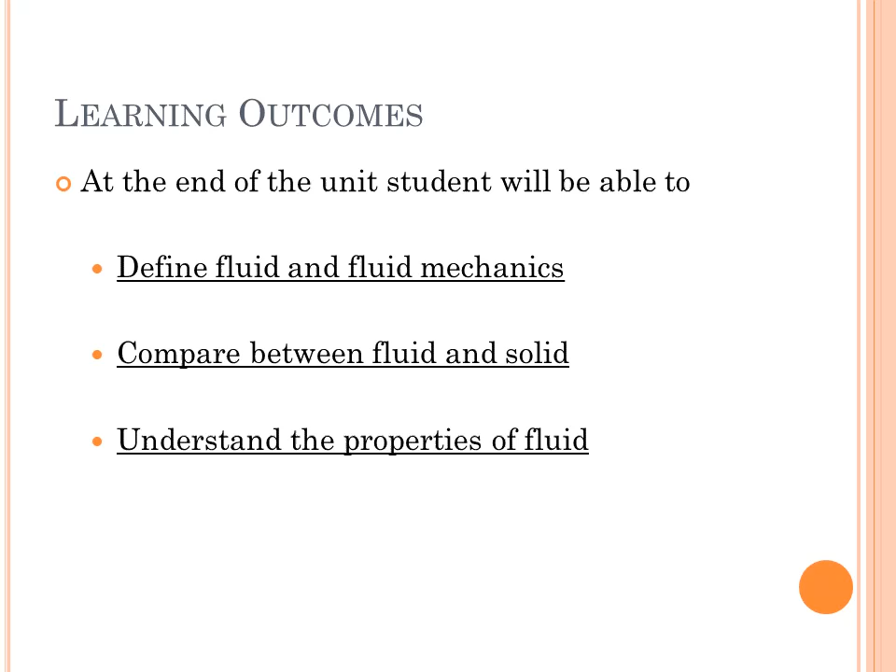At the end of the unit, students will be able to define fluid and fluid mechanics, compare between fluids and solids, and understand the properties of fluid.

Let's define fluid. Fluid is a substance which deforms continuously under the action of shearing stress of any magnitude, and it has capacity to flow. It has no defined shape. Liquids and gases come under fluid.

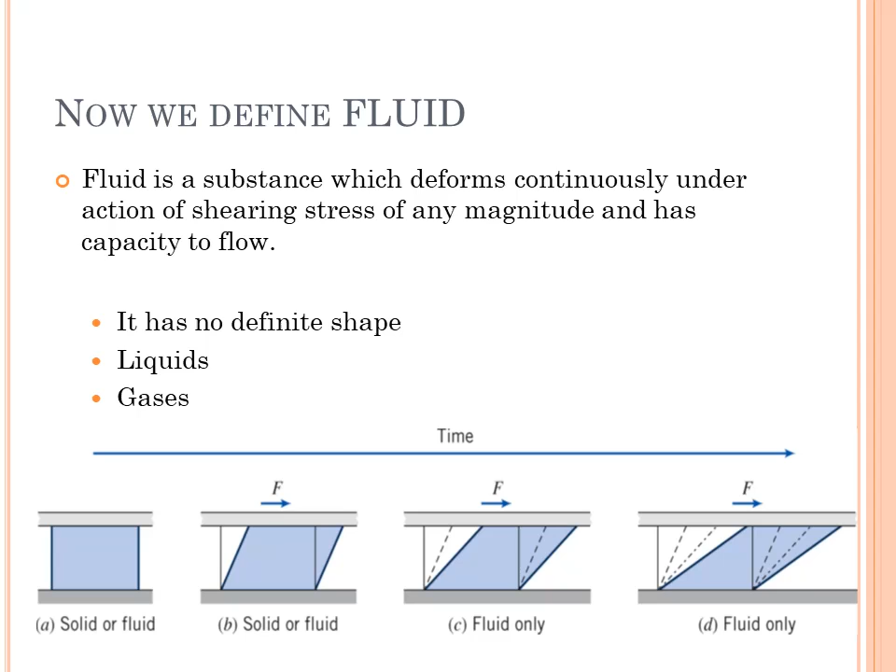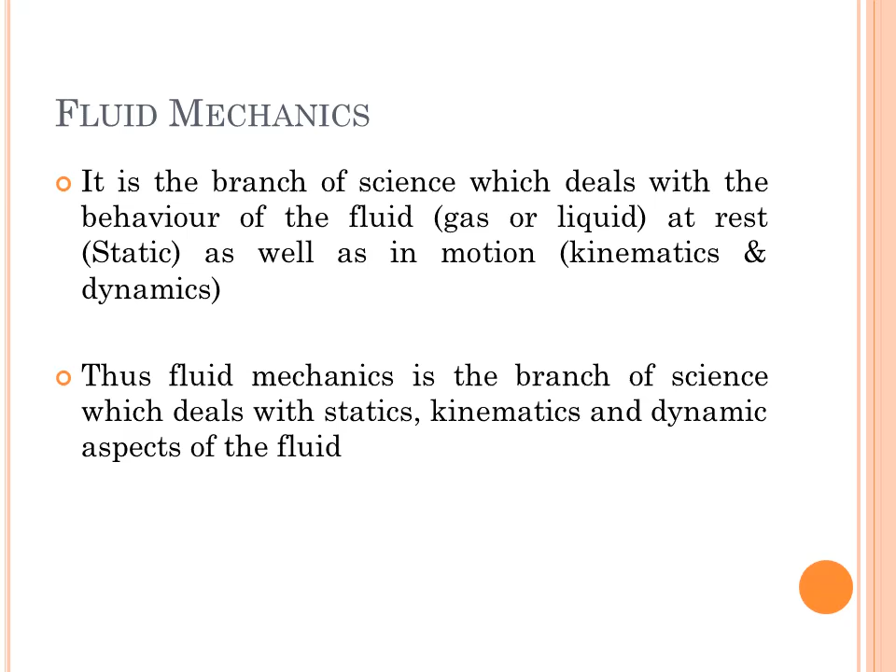Fluid mechanics is the branch of science which deals with the behavior of the fluid at rest as well as in motion. At rest means statics, in motion means kinematics and dynamics. Thus, fluid mechanics is the branch of science which deals with the statics, kinematics and dynamics aspects of the fluid.

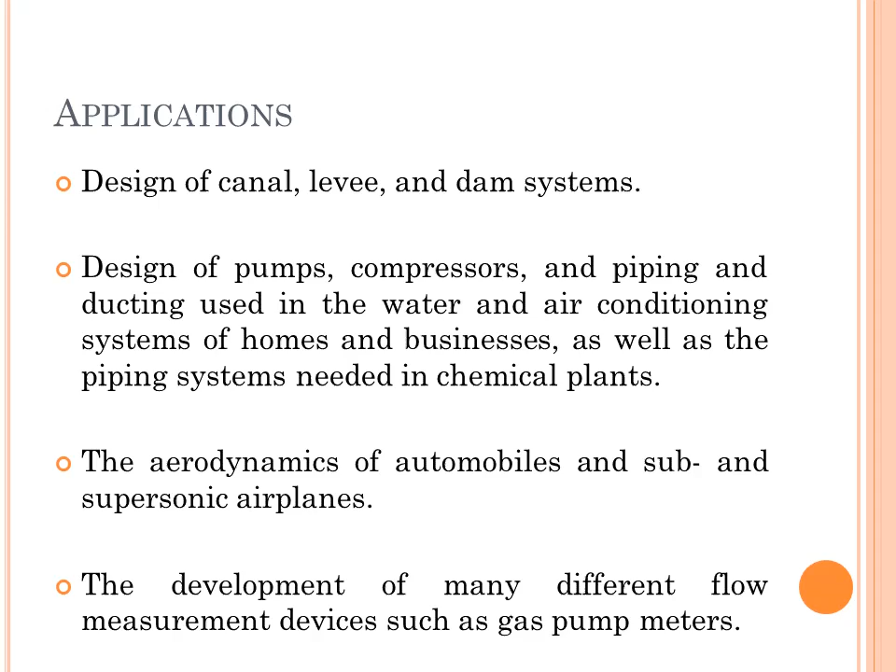Let's discuss the applications. Design of canal, levee and dam systems. Design of pumps, compressors and piping used in the water and air conditioning systems of homes and businesses, as well as the piping systems needed in chemical plants. The aerodynamics of automobiles and supersonic aeroplanes. The development of many different flow measurement devices such as gas pump meters.

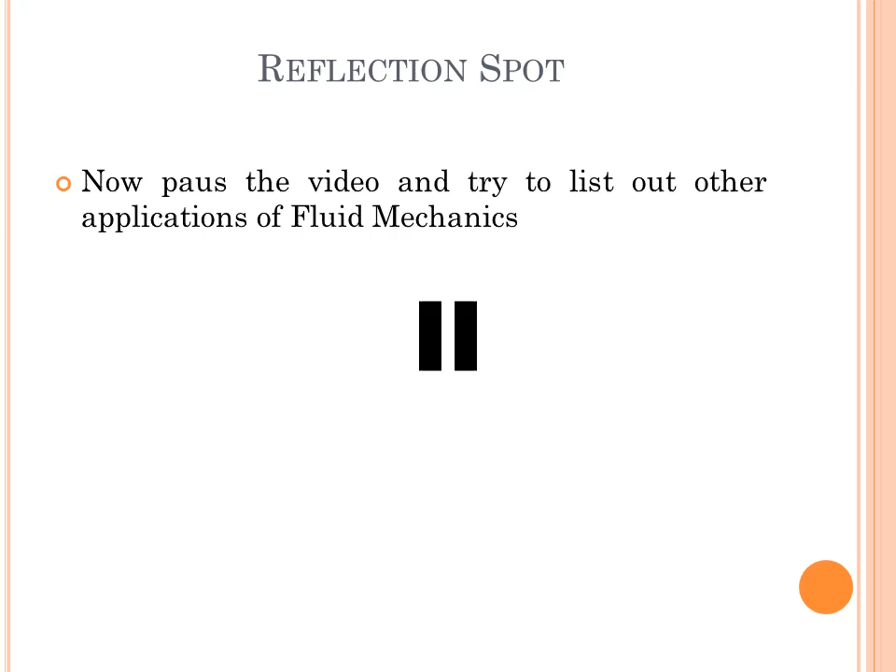Now pause the video and try to list out other applications of fluid mechanics that are used in day-to-day life. Hope you have listed out examples like blood flowing through the veins, and designs of ships, aeroplanes and various types of turbines.

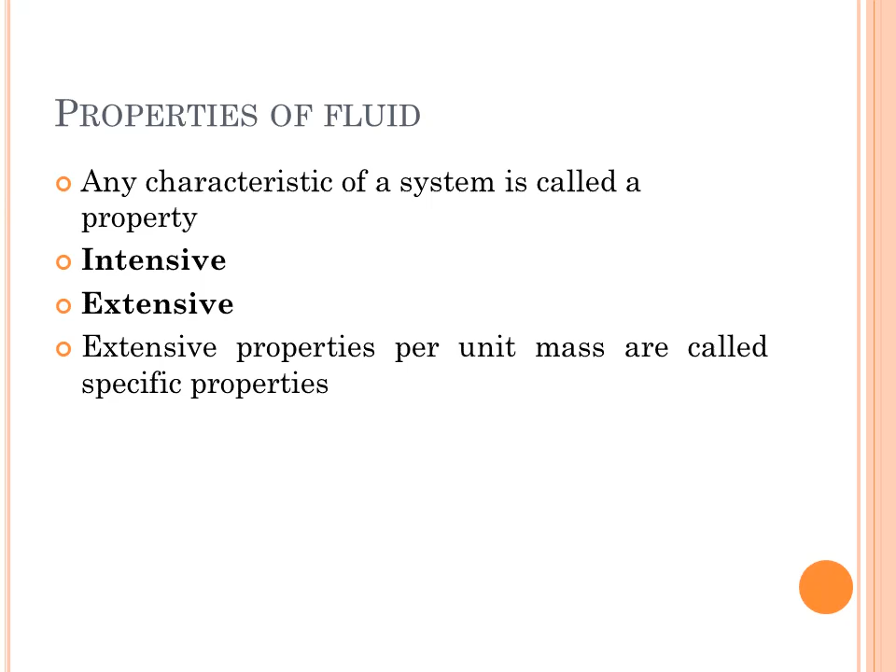Now we will discuss the properties of fluid. Any characteristic of a system is called a property. Properties may be intensive or extensive. Extensive properties per unit mass are called specific properties. The first property is density or mass density, denoted by rho. Specific weight or weight density. Specific volume. Specific gravity or relative density. Viscosity.

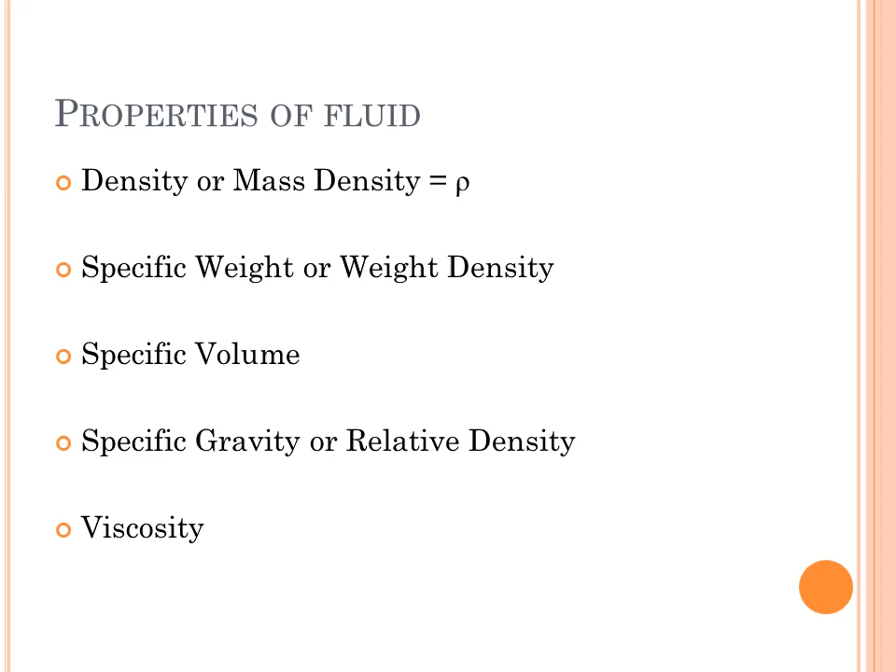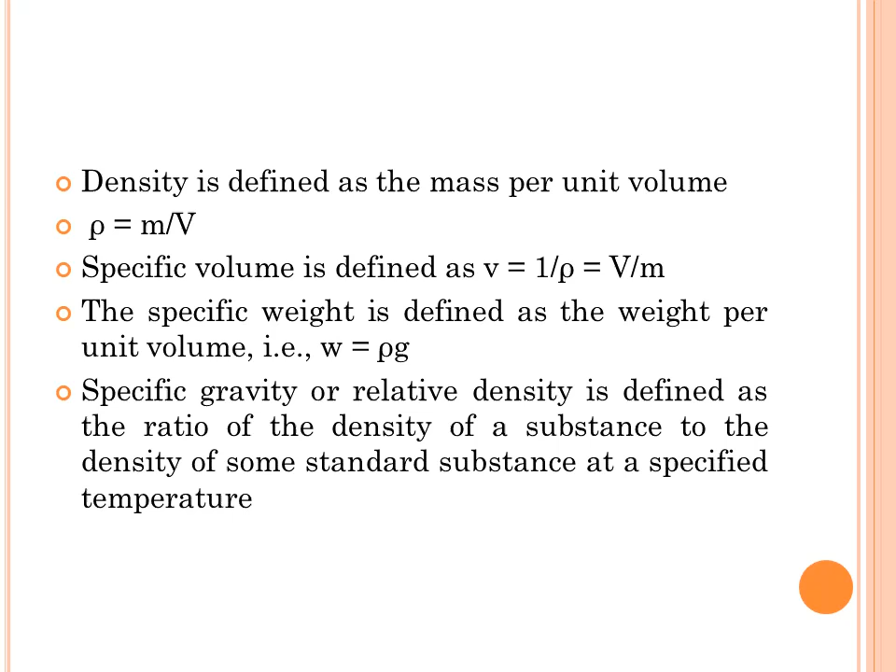Density is defined as mass per unit volume. Rho is equal to mass upon volume. Specific volume is defined as the reciprocal of density, that is volume upon mass. The specific weight is defined as the weight per unit volume. The specific gravity or relative density is defined as the ratio of density of a substance to the density of some standard substance at a specific temperature.

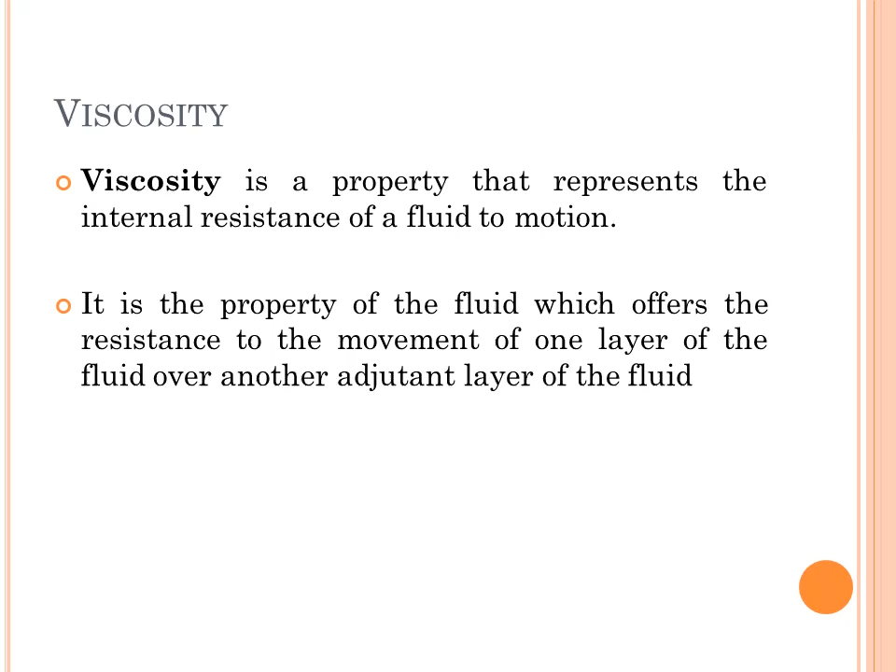Viscosity is the property that represents the internal resistance of fluid to motion. It is a property of fluid which offers resistance to the movement of one layer of a fluid over another adjacent layer of the fluid. Some fluids are more viscous, some fluids are less viscous.

Up till now, we have seen different properties of fluid. Now see the types of fluid. Fluids are classified into two groups, real fluid and ideal fluid. Real fluid is further classified into Newtonian fluid and non-Newtonian fluid. And non-Newtonian fluid is classified into four groups: ideal plastic, real plastic, shear thickening and shear thinning.

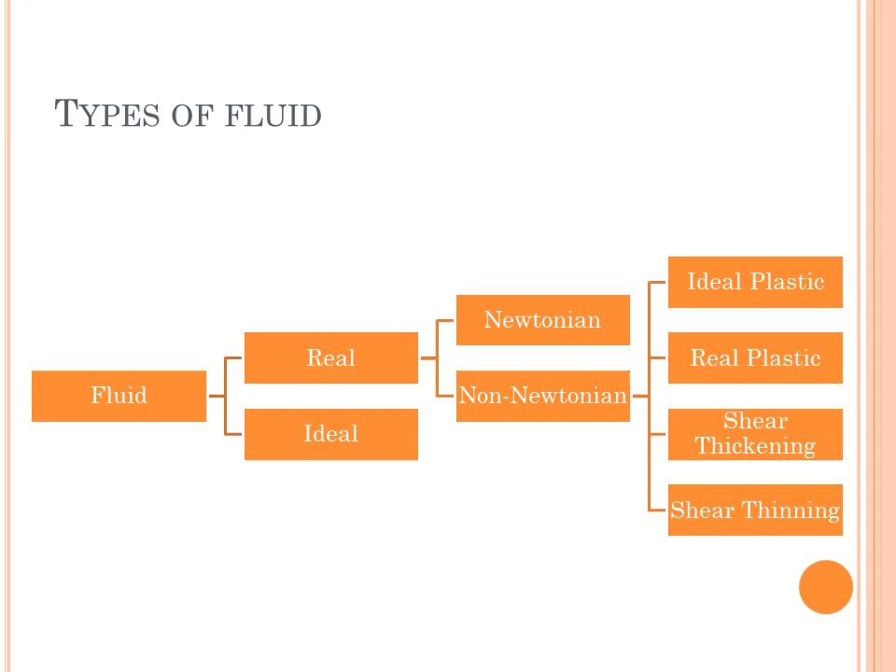Ideal fluid is an incompressible fluid with no viscosity, and it is imaginary. Fluids with viscosity are real fluids. All the fluids existing are real fluids. Newtonian fluids are the more common fluids, such as water and air. If a fluid is Newtonian, it should follow Newton's law of viscosity. That is, shear stress is directly proportional to rate of shear strain. If the shear stress is not directly proportional to rate of shear strain, it is called a non-Newtonian fluid.

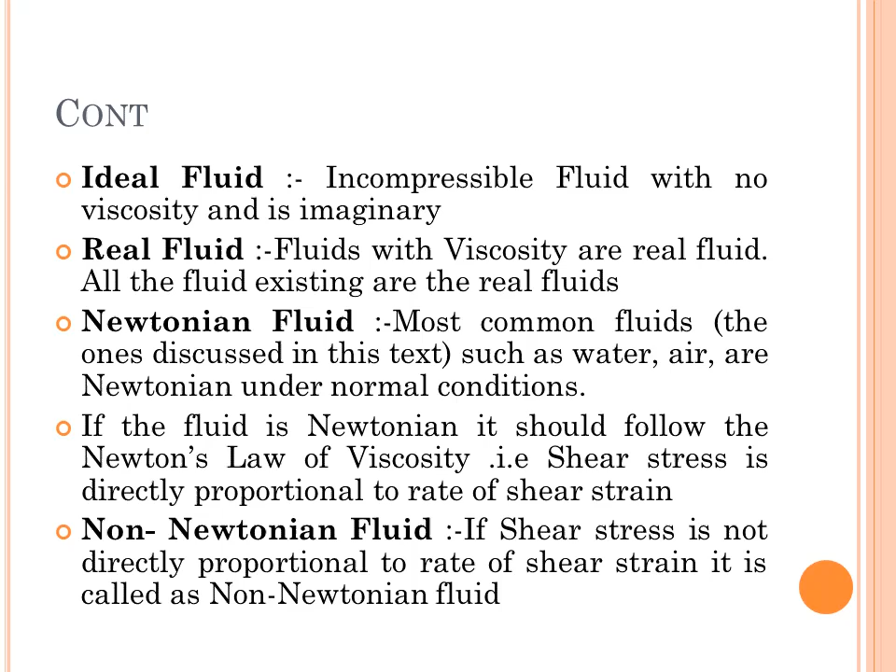In case of shear thinning, viscosity decreases with the increase of the shear rate. The harder the fluid is sheared, the less viscous it becomes. An example is latex paint: it does not drop from the brush, but while painting, it flows smoothly over the wall. Shear thickening: viscosity increases with the increase in the shear rate. The harder the fluid is sheared, the more viscous it becomes. A water corn starch mixture is the best example.

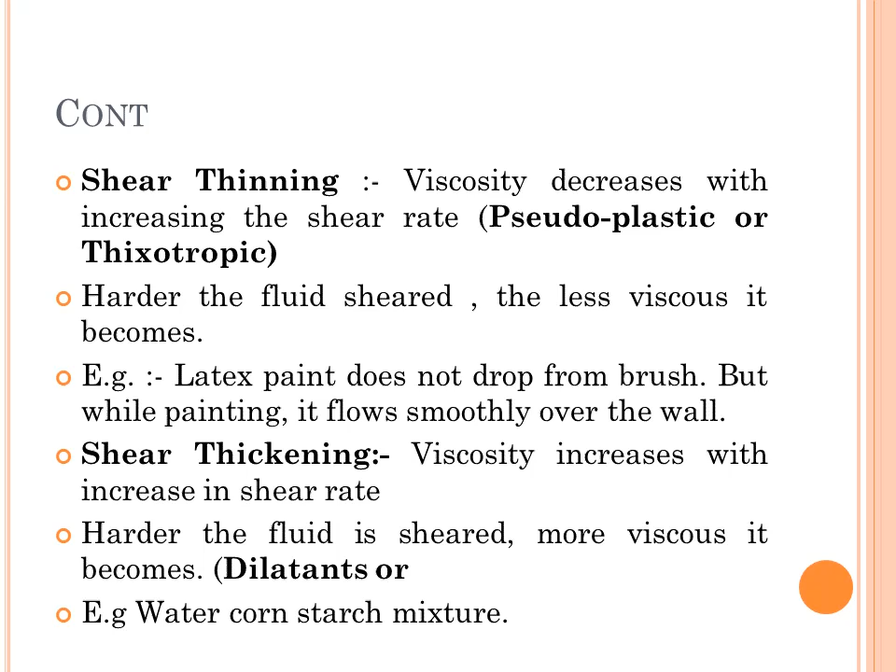Now the next property is surface tension. Many of us would have seen the demonstration of a needle being supported on the water surface without it being wetted. This is due to surface tension of the water. Surface tension may also be defined as the work, in newton meter per meter square or newton per meter, required to create unit surface of a liquid. The work is actually required for pulling up the molecules with lower energy from below to form the surface.